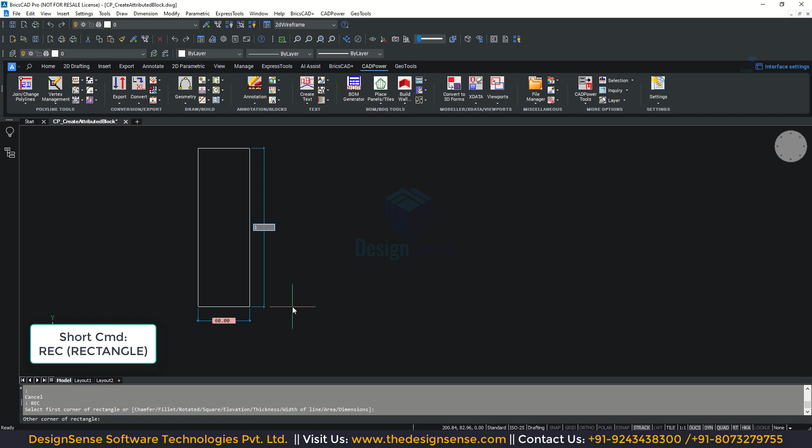So in this example I'm going to create a window whose standard size will be 60 by 100 and I'm going to put some attributes to it. So to make it simple, I'm just going to draw a rectangle 60 by 100 and this represents my window, and here I'm going to add four attributes now.

So you go to CAD Power, blocks, create attributed block, enter attributed block name. Let me give the block name as window. Select entities. I need to first select the graphical entities which go into the block. So I selected this rectangle.

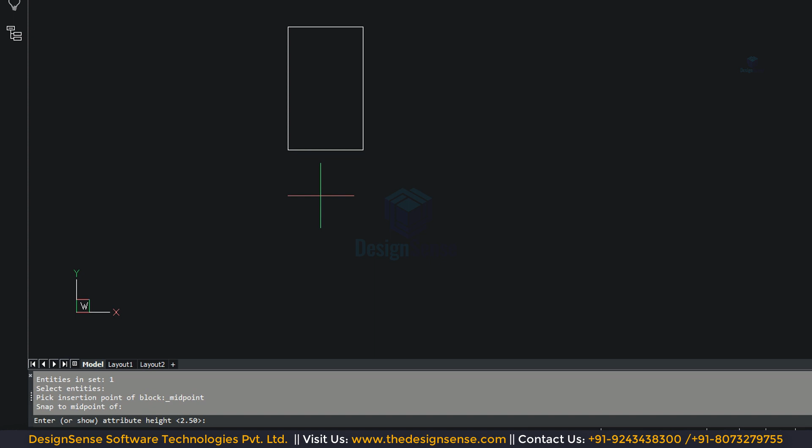Pick insertion point for block. So I need to specify the insertion point. So I'm going to select this midpoint of the bottom as the insertion point.

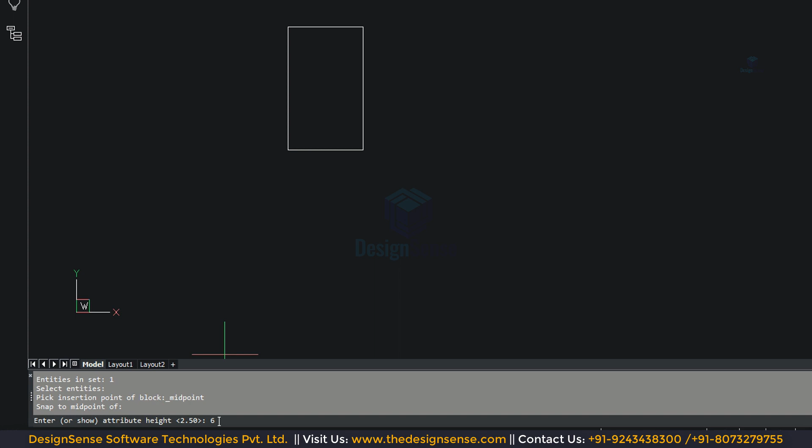Next I want to enter or show the attribute height. Now all attributes created during this command will have the same height. So if you notice, I made this block as 60 by 100, so I'm just going to give something like 6 as the height of the attribute, because 6 is about 10% of 60, so that size I think will look good here.

Next you need to enter the attribute tag names. So tag names are what we discussed just now, those are the properties that you want to capture. So first I want to capture a property called name. So this is the window name.

Now the next tag that I want to enter is cost, so that's the next property. The third one is number, the window has a number like 1, 2, 3, 4 maybe. So just put number. And the last one, let us say, is the supplier. We're going to create a block with 4 attributes.

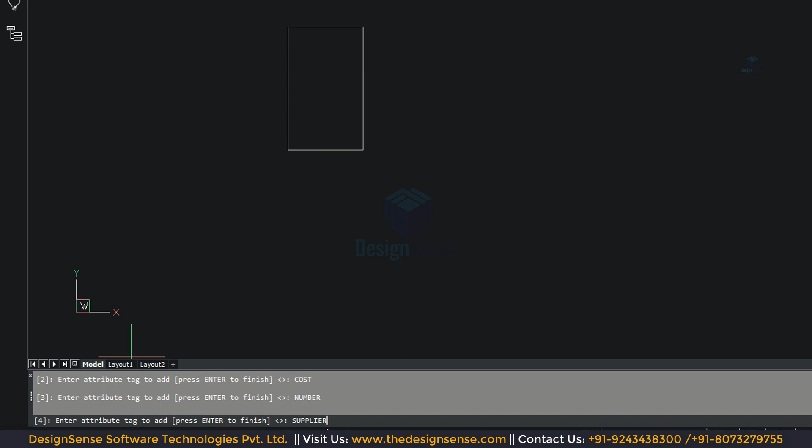Now once you're done, you can just press enter and you can see that it has disappeared from the screen, but it's also given you the confirmation message that the window block has been created.

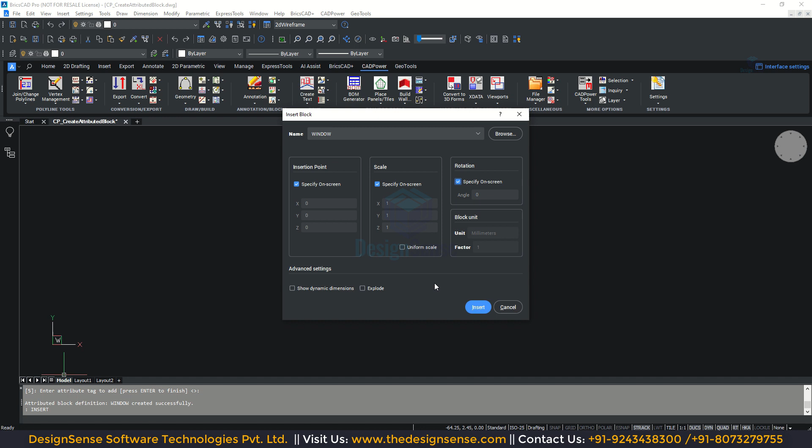Now once the attributed block is created, it's very simple. Just run the insert command and you can already see window here. Insertion point specify on screen, scale specify on screen, rotation specify on screen. That doesn't matter, you can choose it how you want it. Now say OK, X scale factor is 1, Y scale factor is 1, rotation angle is 0.

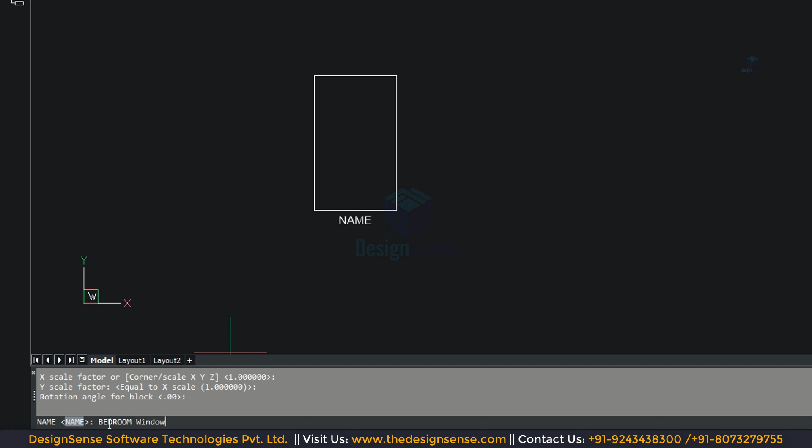Now you can see that it is asking you for the attribute values. So the name, let us say bedroom window, cost say 700, number is 10, supplier is, let's say, Tata.

So I have a window and it is defined as a block. The name of the block is window and it has 4 attributes.

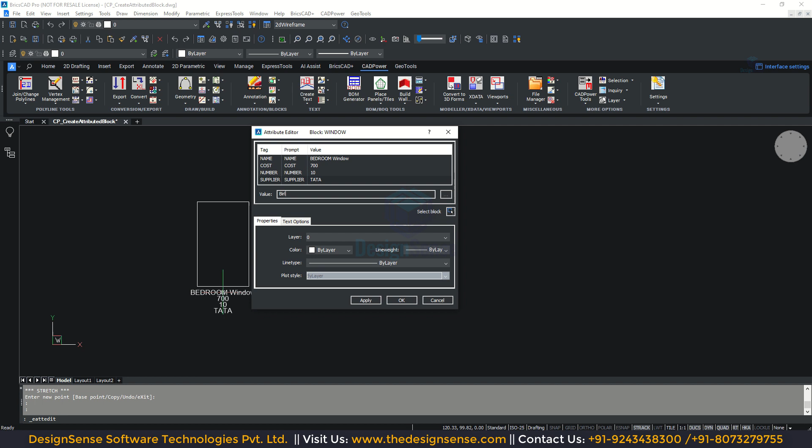So if I double click on this, you can see that the attribute editor will open and here I can change any of the attributes. So for example, if I want to change the value from Tata to Birla, I can just change it here and the attribute value changes.

If I want to change the name attribute to something else, let's say kitchen, I can just change and say apply. So this is how you create attributed blocks in BricsCAD using CAD Power, which makes it much easier for you to do the same job.

So without CAD Power also you can do it. You have to use the attdef command, define all the attribute definitions. In that process you will have to enter all the different attdef parameters and all that. But we believe that this process makes it much easier for the average user to create attributed blocks.

So next time you want to use blocks with properties, please use the CAD Power attributed command to create it. It's very simple and it will make your drawings much more rich and engaging and more meaningful when you have blocks with attributes.